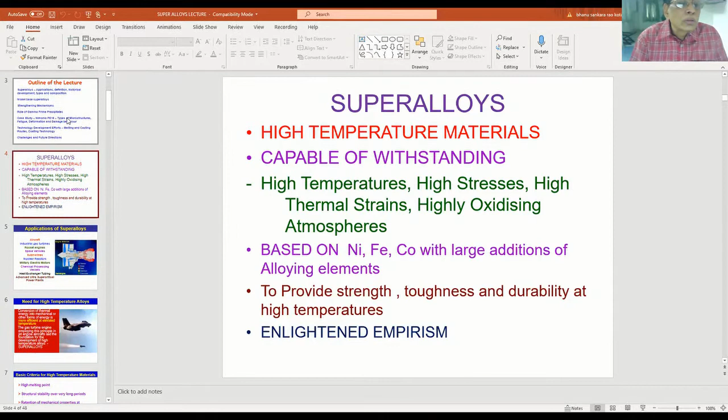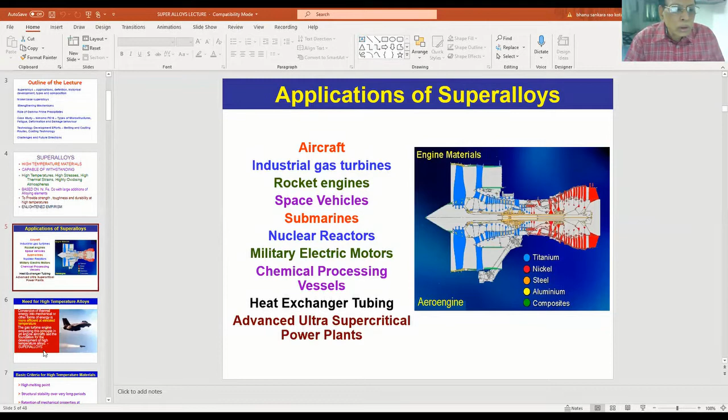What is the need to have these high temperature alloys? In general, conversion of thermal energy into mechanical or other forms of energy is more efficient at high temperatures. The gas turbine engine, employing this principle in jet engine aircraft, laid the foundation for the development of high temperature alloys, which are known as superalloys.

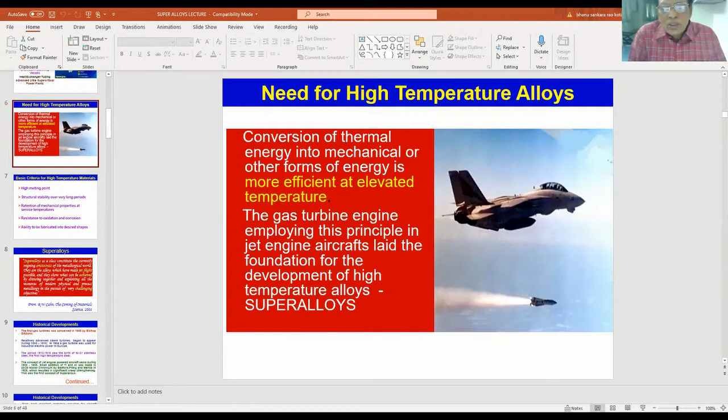What are the basic points you have to look into when you are selecting high temperature materials? The application temperature depends upon the melting point. If you want to use the alloy at very high temperatures, you should choose a material with a high melting point.

Once the material is chosen and the microstructure established, the stability of this microstructure must be maintained over the service life, over very long periods—like nuclear reactors, which run 30 to 40 years. Proper heat treatments develop the structure, which gives tensile strength, impact strength, creep strength, and fatigue strength. These properties have to be retained over long time at the service temperatures.

The resistance to oxidation and corrosion plays a very important role at very high temperatures. Most importantly, superalloys have to be made into the proper shape that is required, and for that you require sufficient ductility during the processing of the materials.

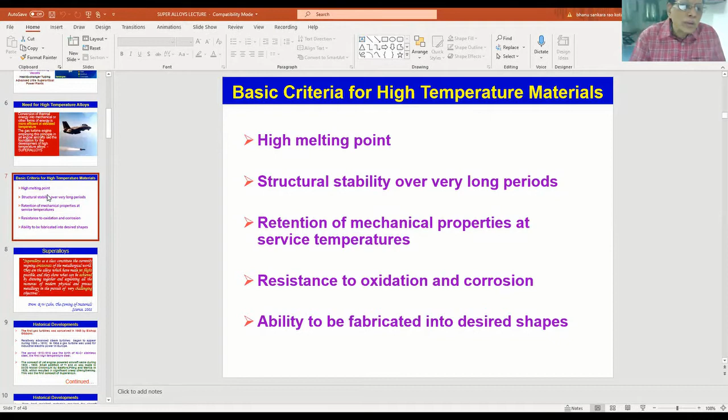The first gas turbine was conceived in 1648. Relatively advanced steam turbines began to appear during 1800 to 1910. In 1904, a gas turbine was used for industrial electric power in Europe. The First World War period saw the birth of nickel chromium stainless steel, the first high temperature steel. This formed the basis for the development of superalloys.

This was more than 100 years ago. The concept of jet engine powered aircraft came during 1920 to 1930. A small addition of titanium and aluminum was made to the nickel chromium stainless steel in 1929.

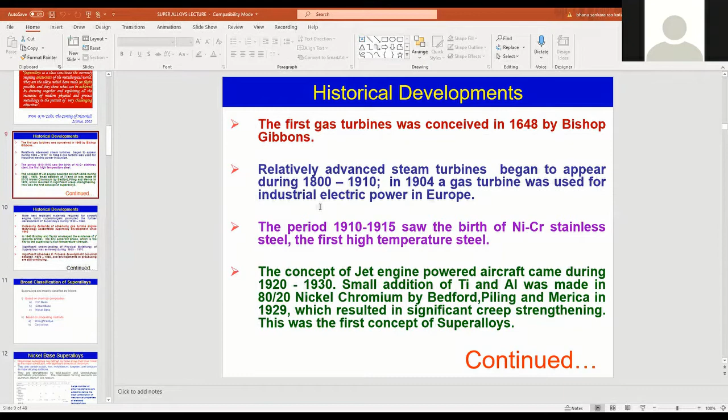More heat resistant materials required for aircraft engine turbo superchargers prompted further development of superalloys during 1930 to 1940. Increasing demands of advancing gas turbine engine technology accelerated superalloy developments since 1940. The Second World War brought superalloys into prominence. Both the First and Second World Wars brought accelerated development of superalloys.

In 1940, Bradley and Taylor envisaged the existence of gamma prime, the tiny coherent phase which is key to the superalloy's high temperature strength. Significant understanding of the physical metallurgy of superalloys was achieved during 1950 to 1970. Significant advances in process development occurred between 1970 and 1980, and developments in processing are still continuing.

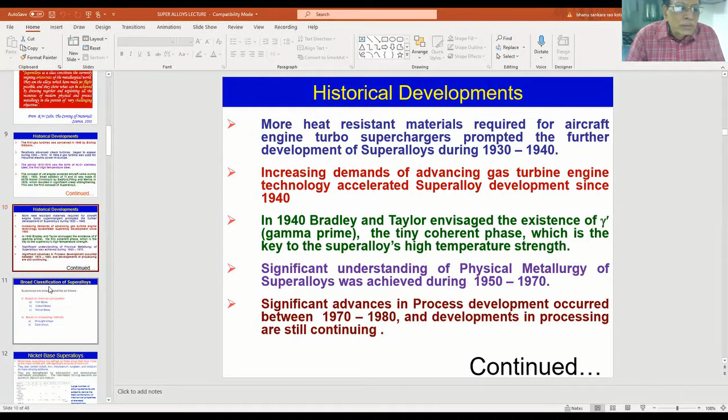Wrought alloys will be subjected to forging and subsequent rolling and other processing methods to get the material into the required shape of plate, sheet, rods, or other forms. Wrought alloys are those which have been worked into the desired shape. Cast alloys, because of having a large number of alloying elements, may have certain types of segregation, and are not directly amenable for processing. Therefore, they are cast into the required shape in general.

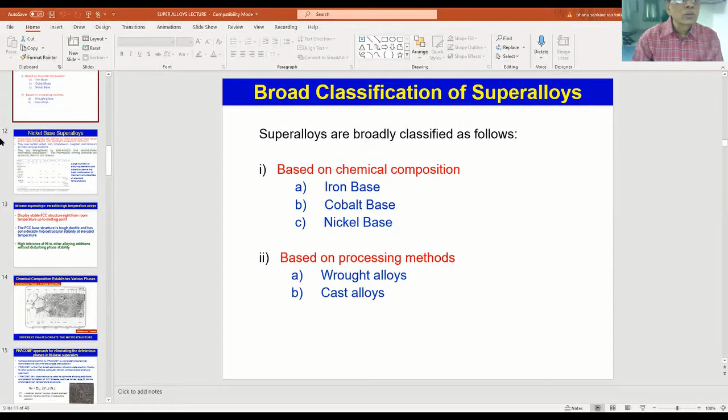This is the most important slide. I said superalloys contain 14 to 15 alloying elements. We will see, in nickel-based superalloys, the role of each alloying element, which is important for the particular purpose for which it has been added.

Nickel-based superalloys are defined as those alloys that have nickel as the major constituent with significant amounts of chromium. Nickel is more than 50%, and chromium will be of the order of 20%, in order to give the oxidation resistance in the material. These alloys also contain cobalt and iron.

Both of these elements substitute nickel in the matrix, and they contribute to solid solution strengthening of the matrix. There are elements like molybdenum, tungsten, and tantalum as major alloying additions. These superalloys are strengthened by solid solution and second phase intermetallic precipitation.

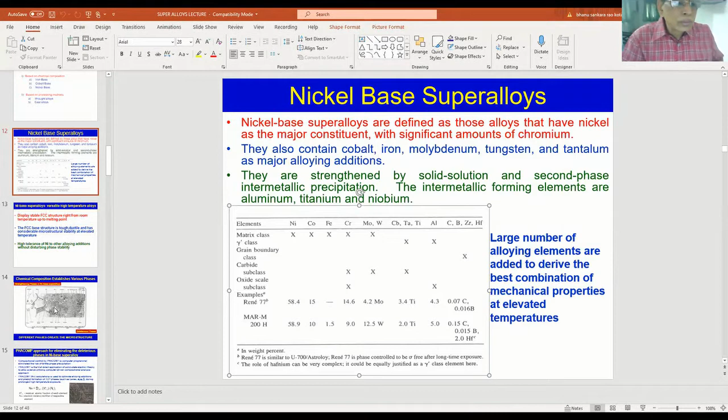Why do you require the base, that is nickel? Nickel-based superalloys are versatile high temperature alloys because of the following reasons.

Nickel is FCC in structure. It is a stable structure right from room temperature up to melting point. So we require FCC phase for high temperature alloys, and nickel is the best choice there.

The FCC based structure, why do you require it? It is tough, it is ductile, and also has considerable microstructure stability at elevated temperatures.

So I told you initially, the microstructure we have generated before putting the component into service should not be degraded; it should be continuously maintained. If the precipitate gets coarsened, strength will go down. If the precipitate spoils, then the function gets impaired. Therefore, it provides the microstructure stability.

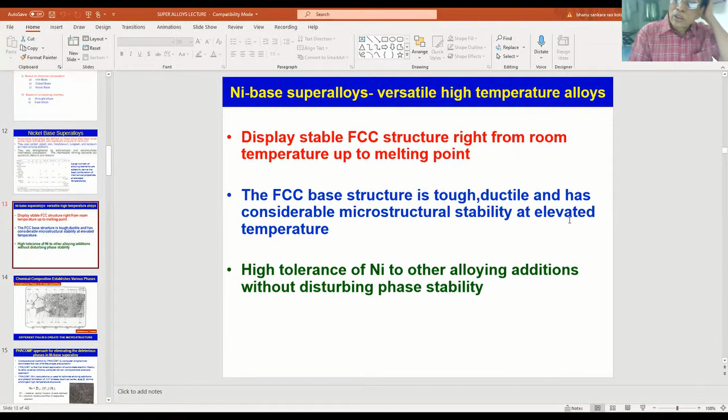Most importantly, nickel has got very high tolerance for other alloying elements because of its unfilled 3D shell. So it takes many alloying elements into its fold, into the matrix, without disturbing the phase stability. That is the reason why nickel has been chosen as the base for superalloys in many applications.

The phases are dependent upon the chemical composition of the alloy. We have seen the alloying elements, so many are there. Some of these alloying elements form desirable phases, some of them form deleterious phases. Different phases constitute the microstructure.

And you can see over the years, from 1940 to 1980.

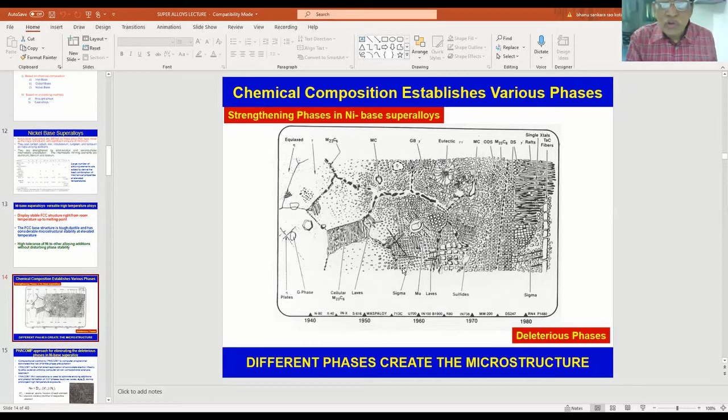So most importantly, what I wanted to say is chemical composition establishes various phases. Different phases create the microstructure. That's why microstructure plays a very, very important role. If you want to have a desired microstructure for long-term service at elevated temperatures, the composition has to be controlled very properly. The undesirable TCP phases have been controlled in superalloys by an approach known as the phase computation approach.

What happens is, when melting and other things are taking place, the phase computation calculations are done for each of the alloying elements present. There is an equation here: the atomic fraction of each element is taken into account, and it is multiplied by the electron vacancy number of the respective element. This is calculated for each element, and the summation is done for all elements, and we get Nv for that alloy. A mean Nv of less than 2.5 for the alloy was found to eliminate precipitation of TCP phases.

Such as sigma, mu, and Laves. That is the way it is taken care of by the PHACOMP approach, which is nothing but a computer program. While melting is going on, the composition of the melt will be monitored and controlled, and that eliminates the risk of brittle phase precipitation during service. So this is a very, very important approach to control the composition against deleterious phase formation.

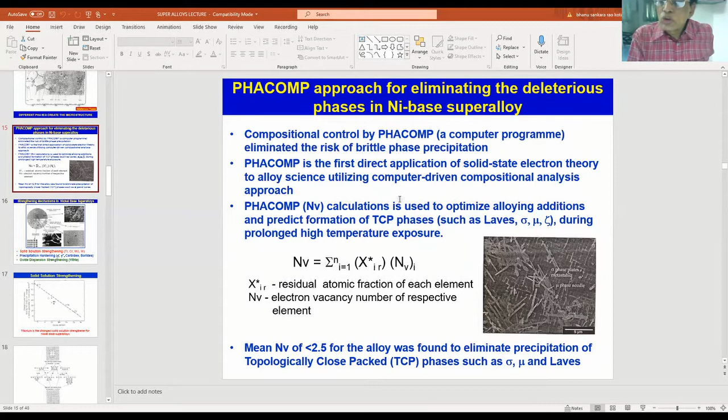So I was talking to you about several elements, and they contribute in different ways. Let us see, here is a microstructure. You can see nickel is substituted by molybdenum here in the matrix. So now the nickel position has been occupied by molybdenum. Some distortion will be introduced in the lattice because of the size differences of each of these elements.

The solid solution strengthening is provided by titanium, chromium, molybdenum, and tungsten. Molybdenum and tungsten are very essential elements for providing solid solution strengthening extending to very high temperatures. And then precipitation hardening - you look at this, these are the gamma prime. Here you can look at this, the gamma prime in the cuboidal shape.

Here you have the two types of gamma prime, fine gamma prime as well as coarse gamma prime, which depends on the temperature employed during the heat treatment. This precipitation hardening to the matrix is derived from the gamma prime and gamma double prime phases.

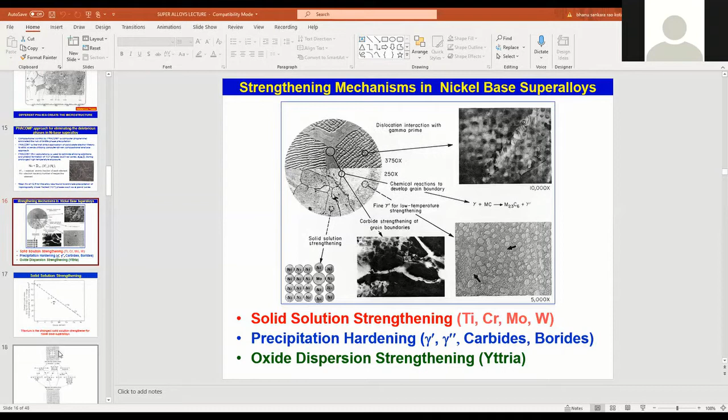Something has happened on the screen here. Let me check it. Yes, now it is visible on the screen. Okay, so interference came automatically. Weather conditions and other things are being projected here on the computer. Periodically it projects, and then automatically it interferes with the things that are going on here.

Now, solid solution strengthening, you see how the change in yield strength occurs in case of superalloys. All the elements have been plotted here: titanium, cobalt, iron, molybdenum, tungsten, chromium, and the change in yield strength that is occurring.

There will be change in lattice parameter by adding the solid solution elements. Now titanium is the strongest solid solution strengthener. But please remember, titanium is a very desirable element for forming gamma prime in the material, which is the major strengthening phase. So the role of titanium, you can see, it plays in three ways.

It provides solid solution strengthening to the matrix. It provides gamma prime, the major strengthening phase. It also participates in carbide formation. So we should be very careful in choosing each element. Since partitioning for these phases will be occurring, we have to carefully choose each alloying element, how much it should be present in the material.

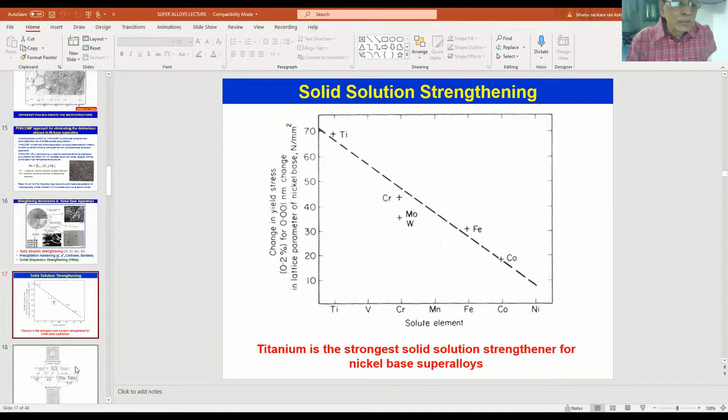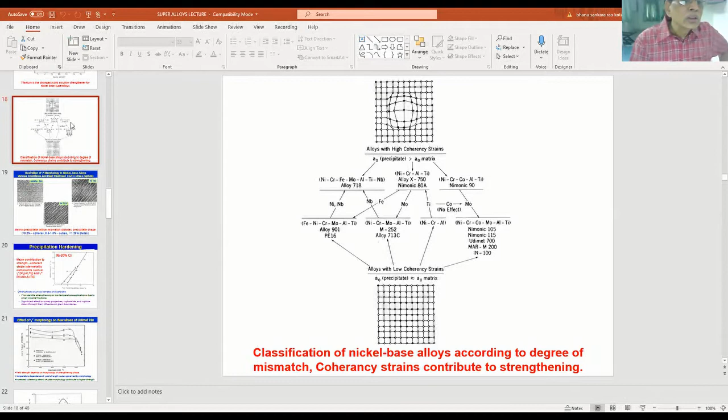Now I am talking to you about gamma prime. First, you see what is the morphology of the gamma prime - that is very, very important. For example, in alloy Udimet 500, you have spherical shape gamma prime particles. In case of IN-100, you have cuboidal shape gamma prime particles. In 713C alloy, you have elongated gamma prime particles like this.

In the previous slide, I talked to you about the lattice mismatch between the matrix and precipitate. That lattice mismatch dictates the precipitate shape. If the lattice mismatch is less than 0.2%, gamma prime precipitates in the form of spheres. If the mismatch is between 0.5 to 1%, it forms in the form of cubes. If mismatch is more than 1.25%, it forms in the form of plates.

So this formation of gamma prime in different shapes will cause variation in the mechanical properties that you are looking for. For example, creep rupture life depends upon the morphology of your gamma prime phase and their volume fraction.

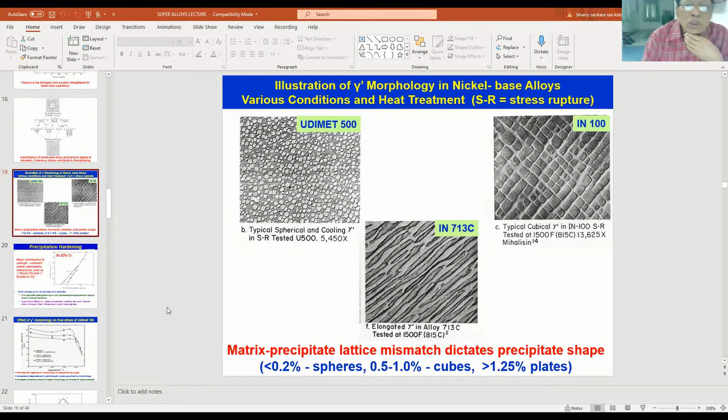You see how much aluminum has to be added in order to get the volume fraction of gamma prime versus total hardening addition in atomic percent. For aluminum, you see you have to add so much aluminum in order to give you the Ni3Al precipitates. When we add titanium, you see you don't need that much amount of aluminum. So aluminum and titanium function similarly. So Ni3(Al,Ti) is the phase which is forming there, and similarly Ni3Nb, aluminum, titanium, and other elements will form other phases.

There are several other phases, carbides and borides. They provide little strengthening in low temperature applications due to small volume fractions, which will be 1%, 1.5%, 2%, not exceeding that. Whereas gamma prime can be up to 70-80%, varying from 10-15% depending upon the amount of alloying elements added.

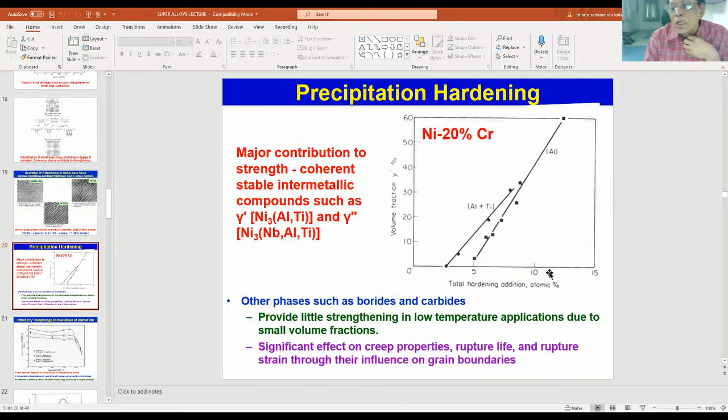Carbides have a significant effect on creep properties, rupture life, and rupture strain through their influence on grain boundaries, contributing to creep resistance at elevated temperatures. The role of carbides at low temperatures is very limited, and the gamma prime and gamma double prime are the major strengthening phases. I have shown you the morphology of the gamma prime that is forming.

You can see here yield strength has been plotted as a function of temperature with different morphologies. You have the cuboidal morphology, and this is how strength varies as a function of temperature. If you have a rod type of gamma prime, the strength goes up like this. If you have plate type of gamma prime, strength goes up like that.

Generally, what we expect is that strength, for example in mild steel, falls down very rapidly with increasing temperature. But in case of nickel-based superalloys, the strength is maintained up to very high temperatures because of several strengthening mechanisms that are operating.

But when you change the shape of the gamma prime precipitate, you see that strength is increasing. That secondary hardening is coming here, and at elevated temperatures, strength is getting increased. That means this is a desirable phenomenon - instead of falling, strength at elevated temperature is increasing.

That's why the composition control and the control of precipitate shape is very, very important.

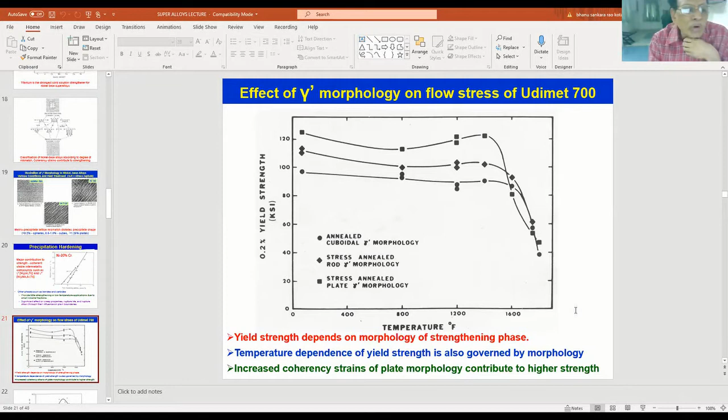Gamma prime particle size also plays a very important role - not only the shape, but also the size. This is the hardness plotted against the particle size, gamma prime size. On increasing the gamma prime particle size, strength is increasing. Look at this in the nickel 20% chromium superalloy, but after a certain size, it falls down.

So here, when the gamma prime size is small, certain mechanisms are operating that contribute to strength. And if you have coarse gamma prime, strength falls down. The optimum size here, for example, is around 40 to 50 nanometers, as shown.

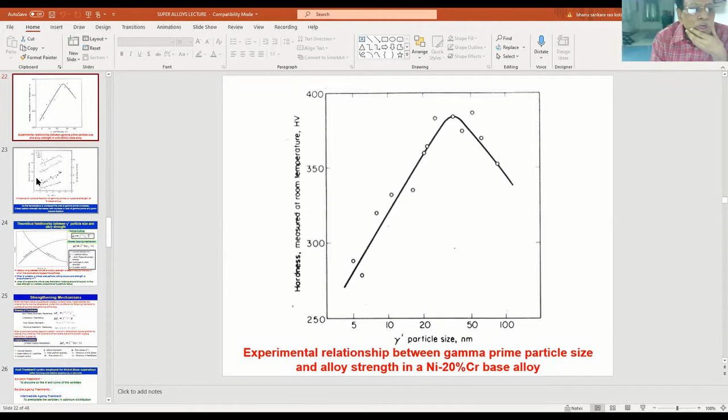Look at this graph - the creep life, how it varies as a function of volume percentage of gamma prime at different temperatures. At 705 degrees centigrade, on increasing the volume fraction of gamma prime, strength is increasing - that is creep strength. Rupture life is much more at 705 degrees centigrade, and it keeps on increasing. Going to 760 degrees centigrade, volume fraction increase still contributes to creep rupture strength, but much less.

If you go to 870 degrees, it comes down further. At 980 degrees centigrade, it is much lower still. So the contribution to creep strength depends upon the application temperature - that is what we would like. As temperature is increased, the size of gamma prime increases, and creep rupture strength decreases with increase in size of gamma prime at a given volume fraction.

On increasing the temperature, you can see that creep rupture strength is coming down, though to a certain extent, with increasing volume fraction of gamma prime, creep rupture strength is increasing. This means that volume fraction plays a very important role, size plays a very important role, and morphology of the precipitate plays a very important role.

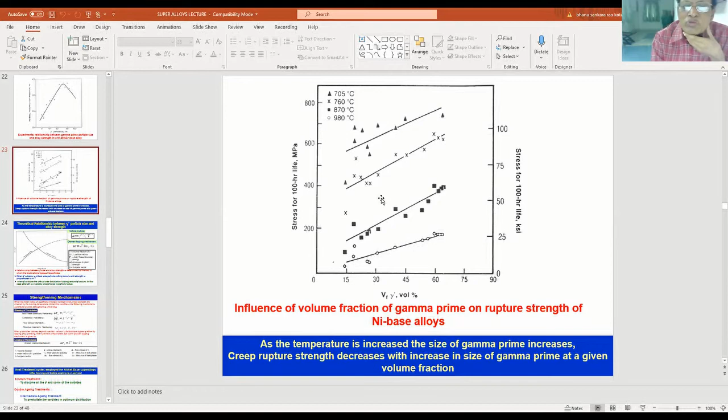Look at this - what happens. This is the same figure I showed earlier, now replotted as strength versus particle size. Strength increases initially with particle size, and theoretically it has to go up like that, but that will not happen. After a certain peak size of gamma prime, the strength will come down like this. This is due to different mechanisms that are operating.

When the particle size is below the critical size, a mechanism known as particle cutting will be operating, where gamma prime will be cut by dislocations passing through the matrix.

When you go to very high particle sizes, the gamma prime will be looped, that is, it will be bypassed by looping, and it will not cut. Once the particle is cut, then coherency and all those things will be playing very, very important role.

Here, when the particle is cut, you see that your strength increase will depend on volume fraction and particle size. And when the particle is cut, there's an ordered phase known as gamma prime, which is cut, it will form an antiphase boundary, and that will be giving very much high strength.

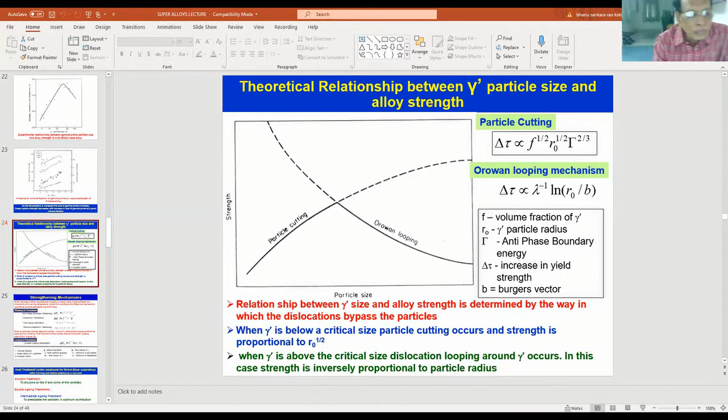This is very, very important. Now, the different phases have to be put at different places. For that, different heat treatments have to be given. Composition is same, but the size, the shape, volume fraction, all these things depend upon your heat treatment.

Grain size of the material, superalloy, depends on the solution treatment. This heat treatment cycle is employed for nickel-based superalloys after forming and before employing in service, that is, after fabrication of your component and before they are put into service. So solution treatment is given at very high temperatures, about 1040 degrees centigrade and above, to dissolve all the gamma prime and some of the carbides, because we are working at different temperatures earlier during fabrication.

So depending on the temperature, we'll be forming gamma prime and carbides in there, but they have to go into solution because you have to realize the full potential of the superalloy strengthening phases by putting them at appropriate locations in the microstructure.

So the treatments subsequently given to the superalloys after solution treatment are double aging treatments or triple aging treatments. If you are employing double aging treatments, one is called intermediate aging treatment, another is called final aging treatment. The goal of intermediate aging treatment is to precipitate the carbides in optimum distribution on the grain boundaries. This is required for imparting creep resistance at elevated temperatures.

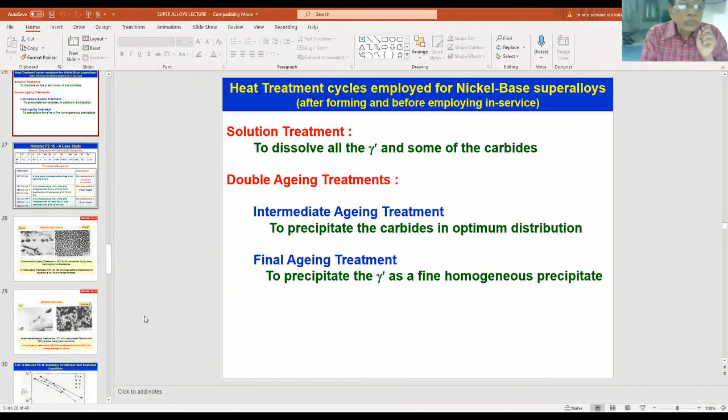So I will give you an example here. In case of Nimonic PE-16 superalloy, which is a very, very simple superalloy, you see that this is a nickel-iron based superalloy. Earlier I was telling that base is, you see that in nickel and iron, each is less than 50%, so combinedly they exceed 50%. So we call it a nickel-iron based superalloy. And to that, chromium of 16.5 is added for oxidation resistance.

And the titanium and aluminum, you see 1.2% each is added to form your gamma prime. Carbon of 0.07% is there in it, it combines with chromium present here to form chromium carbides on the grain boundaries. Molybdenum gives you the high temperature solid solution strengthening, and sulfur and boron have to be kept to very low levels. All these things will be controlled. Manganese and copper invariably get included, which comes from the other alloying elements.

So the treatment employed for this superalloy, you can see the solution treatment at 1040 degrees centigrade. If you go to higher temperatures, above 1040, grain coarsening will occur. But what we require for fatigue resistance is a fine grain microstructure, free from carbide and gamma prime. So 1040 degrees centigrade is enough to cause all these earlier precipitated carbides and gamma prime to go into solution. So I call this microstructure A in the solution annealed condition.

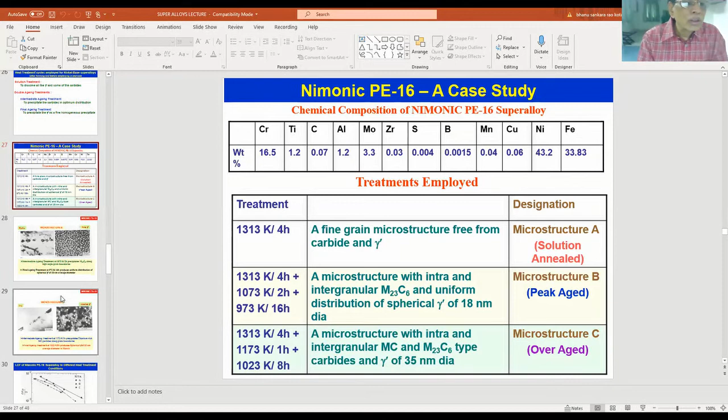Here you can see microstructure B, which was given double aging treatments. At the grain boundary matrix, you see discrete chromium carbide precipitates, M23C6 precipitates. This is the fine spherical gamma prime, formed through the three treatments.

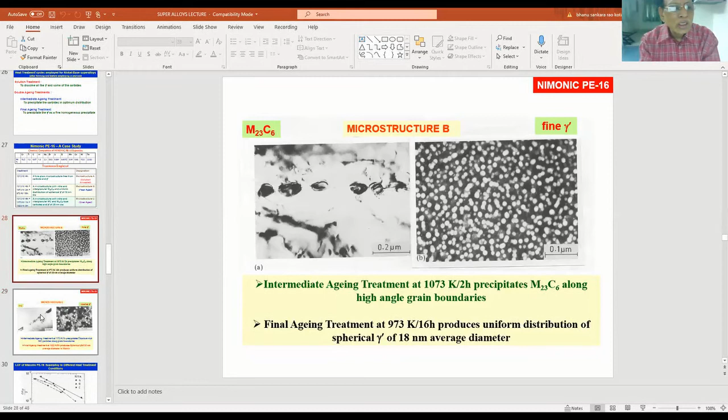Why I brought this to your notice is that your composition is fixed, but you can vary your properties by giving various heat treatments, different heat treatments.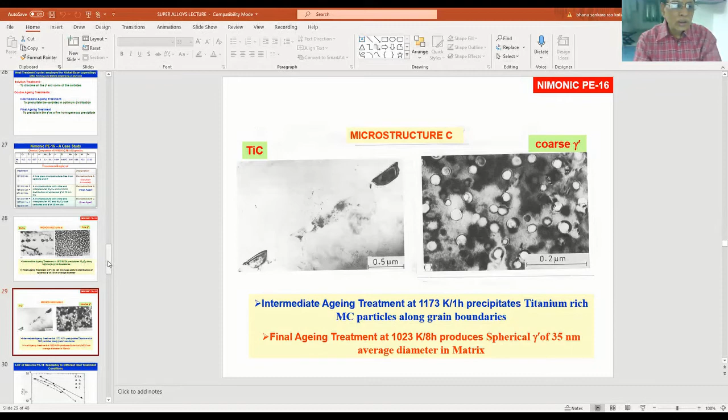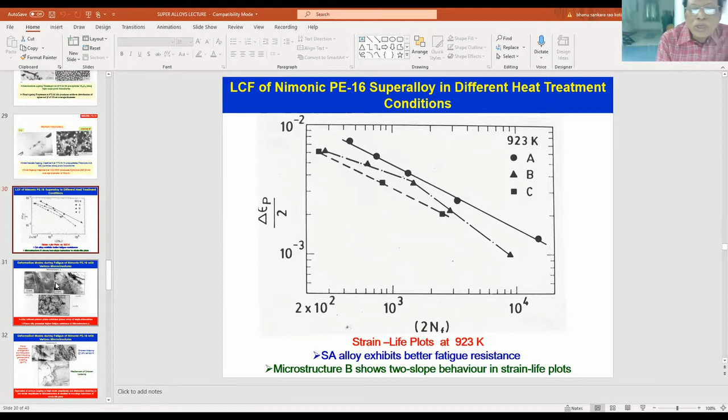But when you peak-age the alloy, these dislocations will not be like this, because your matrix will contain gamma prime precipitates that will be cut by the dislocations passing through. You have the first dislocation cutting the precipitate and the second dislocation passing through.

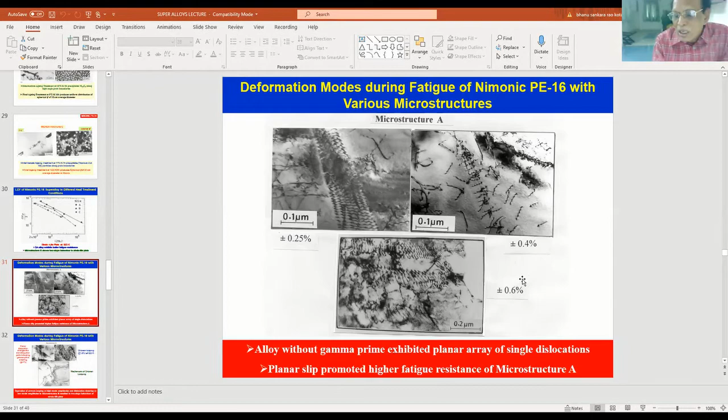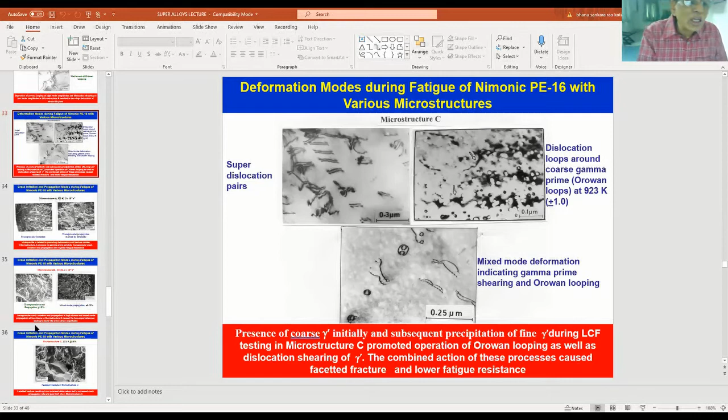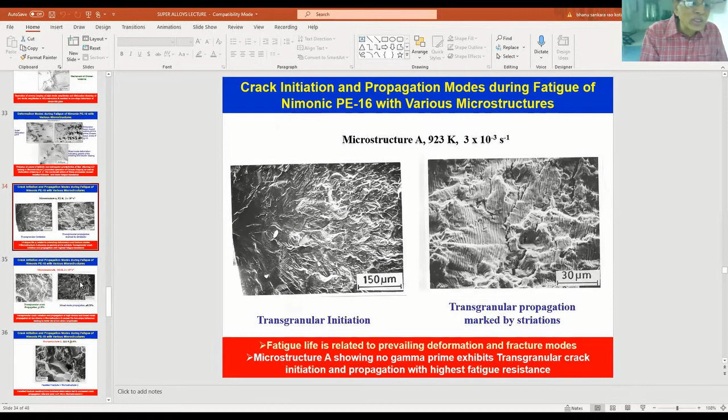In the solution annealed condition, fatigue crack gets initiated from the surface and propagates in a transgranular manner in the form of striations. This type of fracture is an indication of better fatigue resistance in the material in the solution annealed condition. You see in microstructure B, at high strain amplitude, transgranular crack propagation.

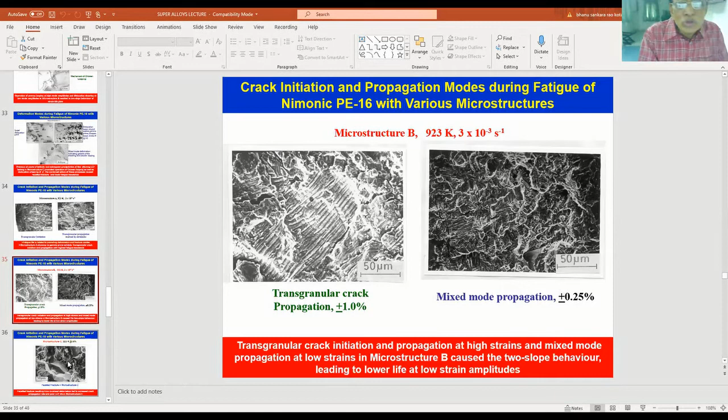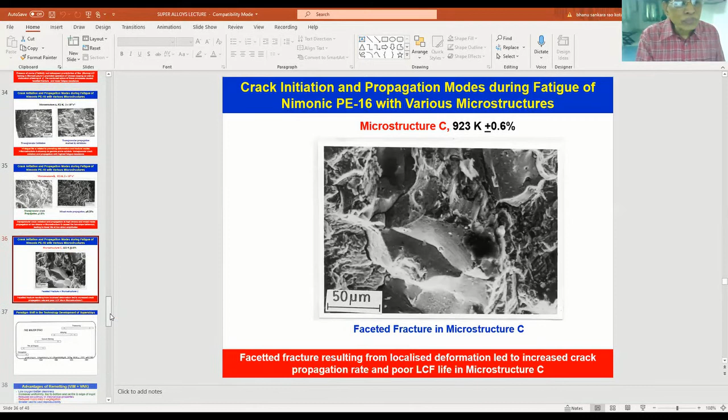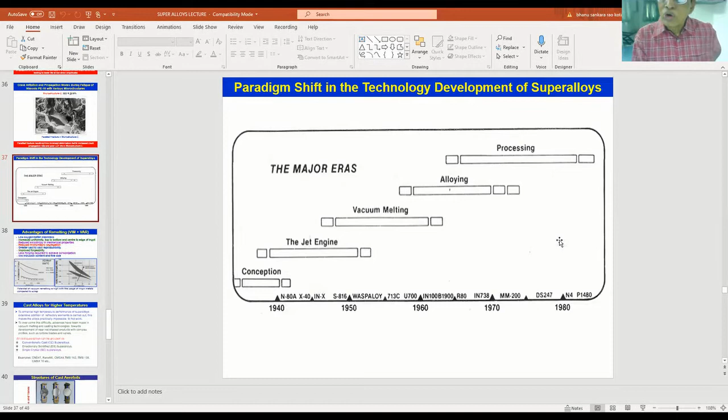Now superalloys are produced by vacuum induction melting process. Already I have discussed with you the variations that have come, and the processing now involves vacuum induction melting followed by vacuum arc remelting or electroslag refining. At times, if you want very high performance in the superalloy, you have to use a triple melting process: vacuum induction melting followed by vacuum arc refining, or vacuum induction melting followed by electroslag refining followed by vacuum arc refining.

You can see here the advantage of remelting with vacuum induction melting and vacuum arc refining. They have low oxygen and better cleanliness when you apply these two processes together, one after the other. There is increased uniformity from top to bottom and center to edge of the ingot, uniformity in composition and structure, reduced anisotropy in mechanical properties because the material is more homogeneous, and there is reduced micro and macro segregation.

There is reproducibility from cast to cast. It is not always possible to produce material in 100 ton batches; we have to use furnaces of 10 tons, 25 tons, so there will be 4 casts in 100 tons. Reproducibility should be there in composition from one cast to the other, and it is possible by employing these processes. There is improved forgeability, less forging required to achieve consolidation, and low inclusion content with fine grain size.

Here in this picture, you can see air melting and ESR that we have used. This is the combination of yield strength and toughness we are getting.

If you are using vacuum induction melting and electroslag refining, you see that strength has gone up. If you have used a triple melting process, VIM, ESR, and VAR, this has gone up even more clearly.

What you have to choose is don't use the scrap. When scrap is there, the properties you get will be lesser. You see pure virgin material, if you use it for developing the superalloy, there is a huge difference between melting scrap and melting pure virgin materials.

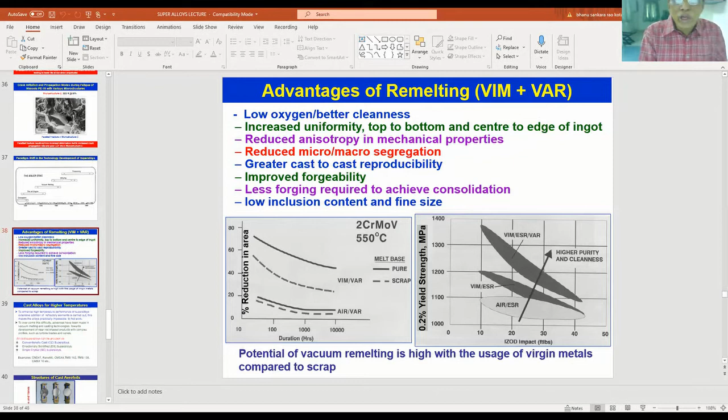Generally, cast alloys cannot be forged and other things, but cast alloys can be used at higher temperatures than wrought alloys.

We have a large number of refractory elements in the superalloys. Because of that, the refractory elements have high melting points, and we have to work at very high temperatures. Hot working has to be done, which is practically impossible. To overcome this difficulty, advances have been made in vacuum melting and casting technologies towards development of near net shaped products with complex profiles such as turbine blades and vanes.

All cast superalloys can be grouped as conventionally cast superalloys, directionally solidified superalloys, and single crystal superalloys. These are some of the examples of the single crystal superalloys that were there.

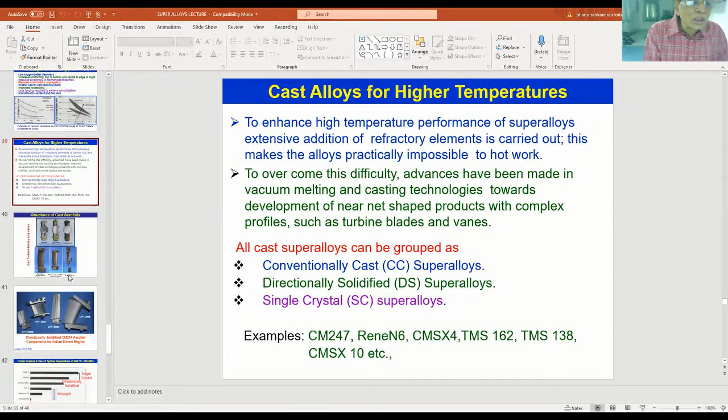Now look at this, what it means. Initially I was telling that the material is polycrystalline and equiaxed. This is the structure we have. Transverse grain boundaries are not required because they produce creep cavities at elevated temperatures.

Therefore, we have to eliminate the transverse grain boundaries and produce grains like this in the form of directional solidification, and then grains are produced like this. Nowadays, completely the grain boundaries are eliminated and single crystal superalloys are produced for the turbine blades, for gas turbine blades.

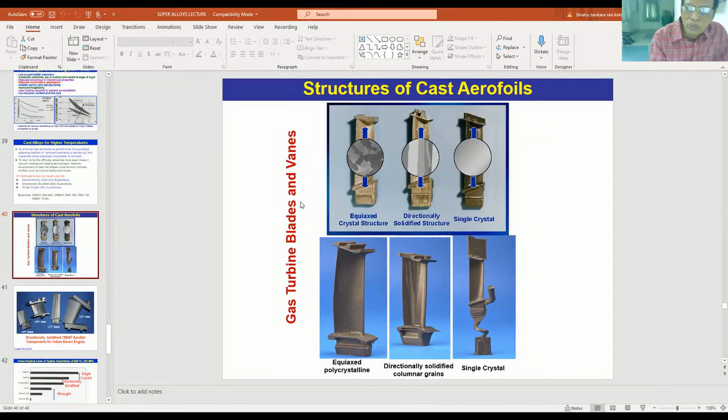You can see those products for the Kaveri engine, which have been produced at DMRL, Hyderabad. These are directionally solidified. You see the grains are oriented in this direction.

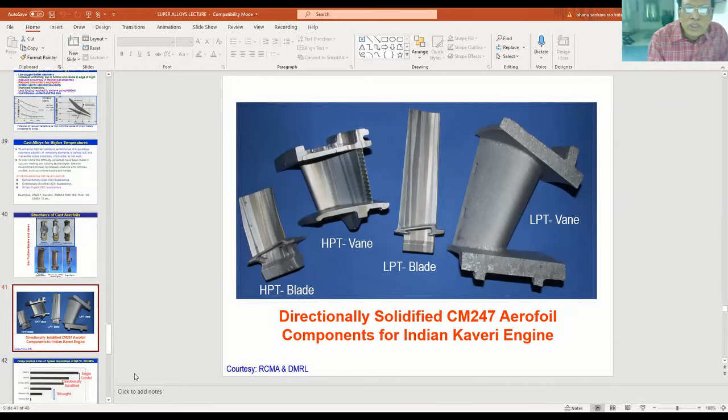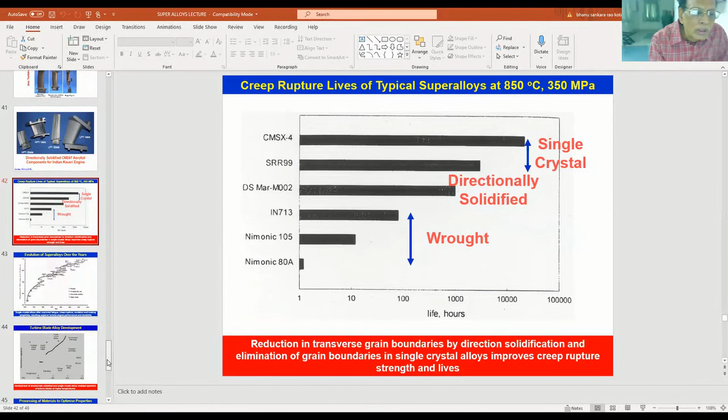Here, this is temperature for 1000-hour creep life, plotted over the years. These are wrought alloys, and then we have conventionally cast alloys, directionally solidified superalloys, and now we have the single crystal alloys here. Over the years, the processing technology has changed, and it is a continuous process which is still continuing.

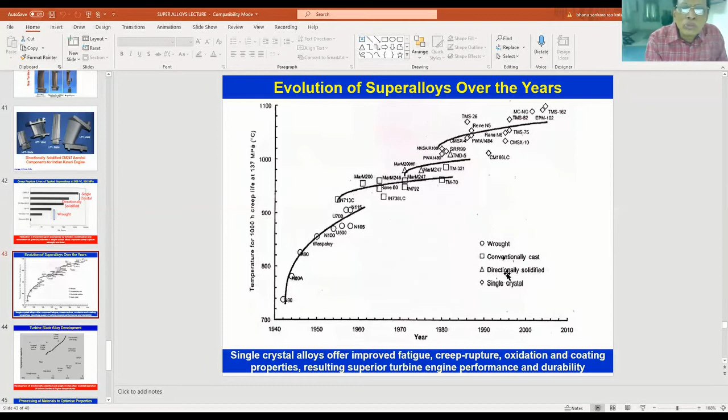Single crystals have to be produced on an industrial scale in order to put them in engines and derive the benefit of using the engine at very high temperature.

Sorry to disturb you, Dr. Rao. Maybe we can conclude in a minute or two so that some questions can be taken.

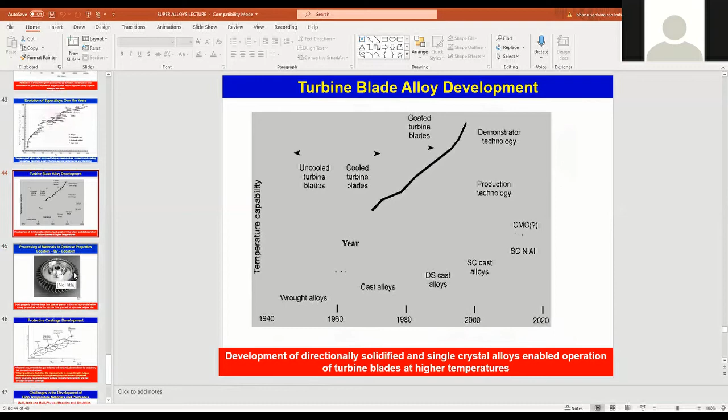I have 3 slides to complete in 2 minutes time. Here you can see the processing of materials to optimize properties location by location. Here you have the turbine disc.

The turbine disc is a dual property disc. What we require is better creep resistance in the rim, and in the bore we require LCF resistance. Now look at that, both these properties have to be combined. You have to produce coarse grains in the rim and fine grains in the bore. This has been achieved, and the work has been done at DMRL.

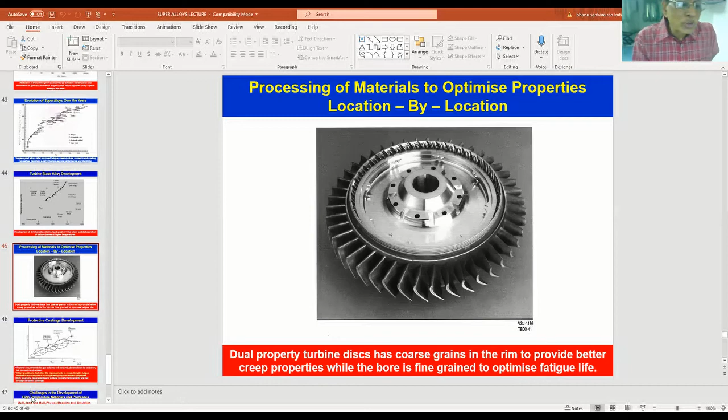That is the disc that has been produced, has been shown to you. So this is how things have changed over the years. You see that temperature capability, how it has increased by 2020.

What we are doing now, you can see that in order to improve the temperature capability of the superalloys, thermal barrier coatings have to be put on. Yttria stabilized zirconia based TBCs have been developed on single crystal superalloys, and further developments on mullite based coatings are being developed for intermetallic single crystal superalloys.

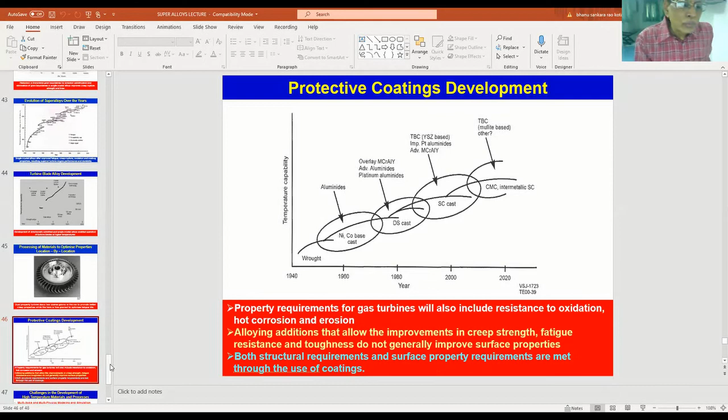How can we identify which type of precipitates are formed? We do composition analysis—from the morphology we can identify, but then by observing with transmission electron microscopy we can get the composition analysis. The elements that are present we can get, and from that we can say.

Next question, from Raj Shekhar Hanendra: how to identify the property changes in gamma prime particles? We have shown that particle size plays a very important role—fine gamma prime is required for getting better properties in materials. In many cases, the size changes, and as I said at the end, monitoring sensors are required to know what temperature the part is operated at. We have plots generated as a function of temperature showing how gamma prime coarsens with increasing temperature. Once we know the temperature, we can say what size is there, and the changes in composition. Gamma prime will still be there as a stable phase, but coarsening will occur due to exposure at high temperatures.